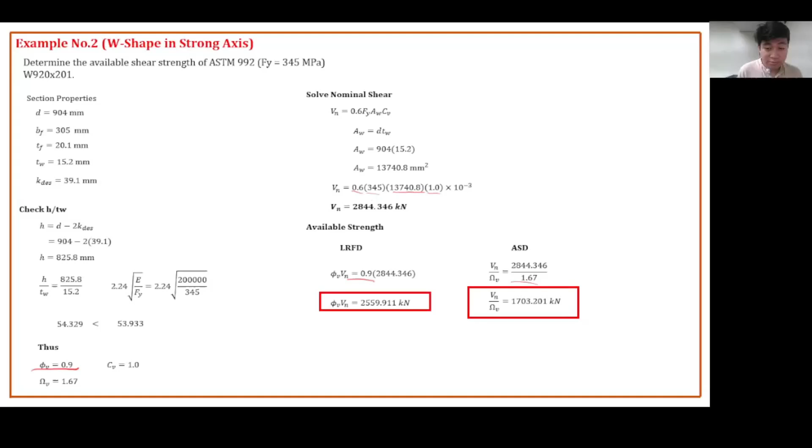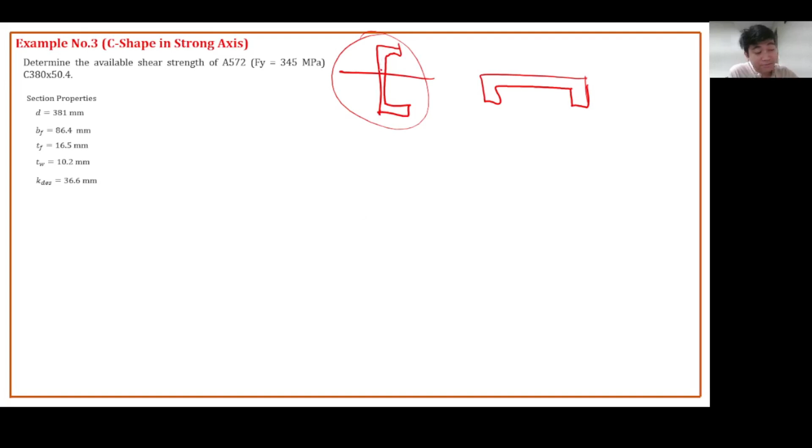Okay, so for these problems, we will solve the C shape channel, which will bend about the strong axis. Usually we have to place the beam like this, because if you place it the other way, it will easily bend in terms of flexure and shear—it's very weak. So we place it like this, because later on we will explain the area of the web here. How do you calculate the area of the web?

First thing to do is to check H over TW. You don't have to check this one because it is only applicable for webs of rolled I-shape members, so you now proceed with this one.

H over TW. For doubly symmetric shapes, singly symmetric shapes, and channels—other doubly symmetric shapes are hollow steel sections, which are doubly symmetric in both axes. Even for built-up sections, for built-up I you may use number 2, but for rolled I always use 1.0. For built-up I you may use this for hollow steel sections because those are doubly symmetric shapes.

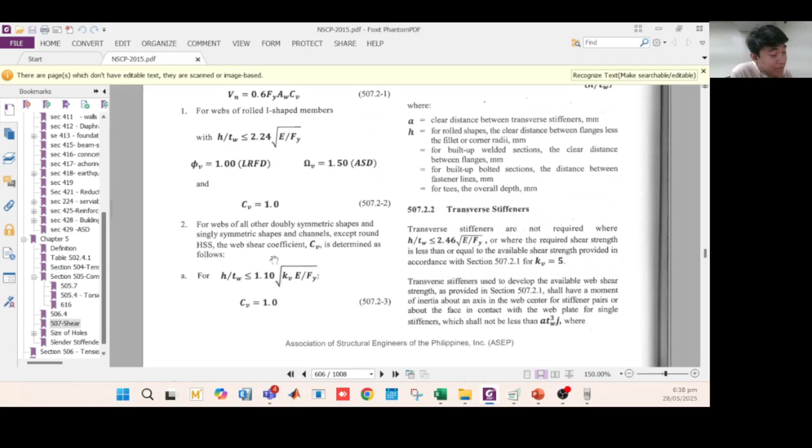For number 2, we're dealing with channels. So we have to check what is the value of H over TW compared to 1.10, and also 1.37 times the square root of E, square root of KV E over FY. So we have a new variable here.

What is KV? KV is 5 plus 5 over (A over H) squared. We know the H. How about A? What is A?

A is the clear distance between the transverse stiffeners. So what are stiffeners? Transverse stiffeners are structural elements used primarily in plate girders, box girders, and thin-walled structural members to prevent buckling of the web. Due to the shear, due to the large value of shear, the web may buckle, so we provide these stiffeners to make the web stronger. They are oriented perpendicular, or transverse, to the longitudinal axis of the member—always positioned perpendicular to the longitudinal axis.

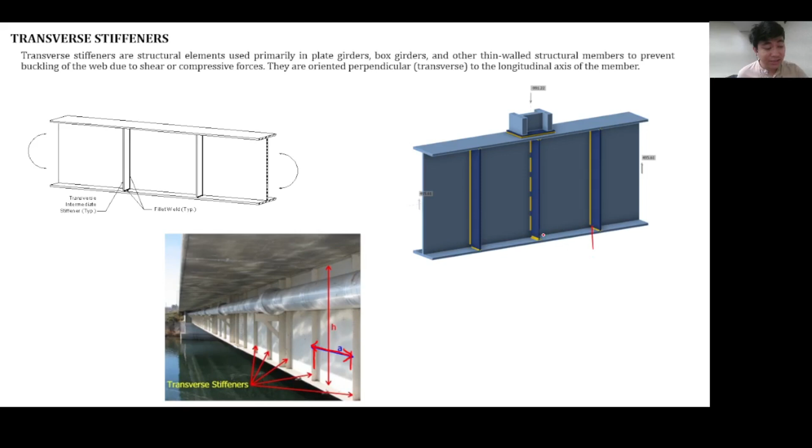These are transverse stiffeners. So what is A? A is the clear distance now between the stiffeners—clear distance, not center to center, but clear distance. That is the value of A in millimeters, and you divide it by H.

You know the H. If that value is greater than 3.0, you use KV equals 5. The lowest value of KV is actually 5, for stiffened webs. And if your A over H is greater than this value, you have to check this value—still 5. You may use this for checking A over H, or 3.0, but we can just use 3.0.

If this was not satisfied, use this formula.

For unstiffened webs with H over TW less than 260, what do we mean by unstiffened webs? For W sections, webs are stiffened because they are supported top and bottom. So what are unstiffened webs? As you can see here, the web is only supported here, but on the bottom portion it is not supported. When you say stiffened, it is supported on both ends—those are stiffened elements. For unstiffened elements, it is not supported on both ends. So these are unstiffened, usually like flanges.

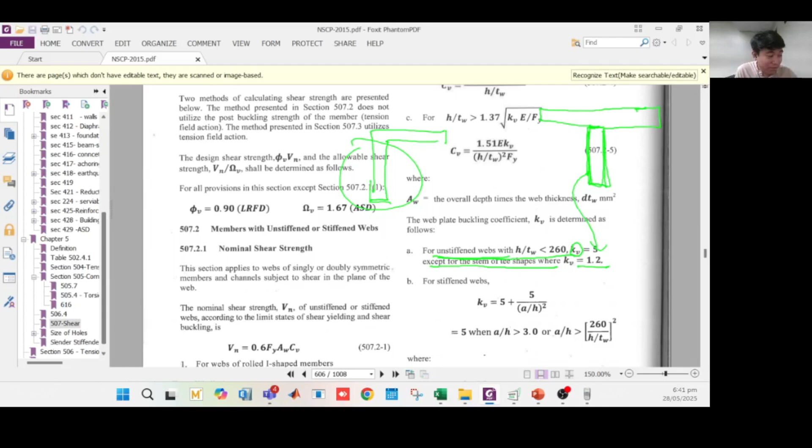If we're going to check this code, this is only applicable to double symmetric and single symmetric shapes. Ibig sabihin, hindi siya applicable sa angle bars, yung number 2. So the angle, not applicable siya dito, class. You don't have to use this for angle bars.

So try to think of another shape which is singly symmetric na may unstiffened webs. So, built up, no? You may create a built up as long as the web is unstiffened, not supported top and bottom. Okay, so those are the values of KV.

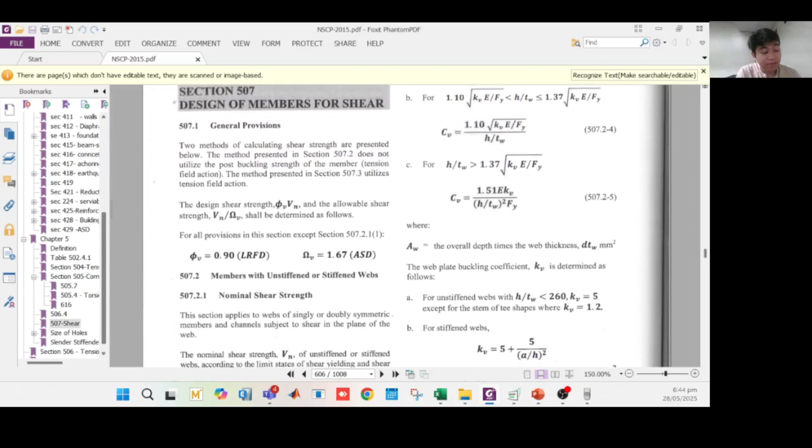What if wala naman sa problem na binanggit na may stiffener? Walang sinabi dito. There's no any diagram which shows the distance of the A. So we can say that there's no stiffener, or we can just assume that no stiffener all throughout the entire length of your beam. So ibig sabihin your A is very large compared to H. And if you compare that large value of A over H, that will be always greater than 3.0.

Or if there's no stiffener provided on your beam, always say that KV is 5.0.

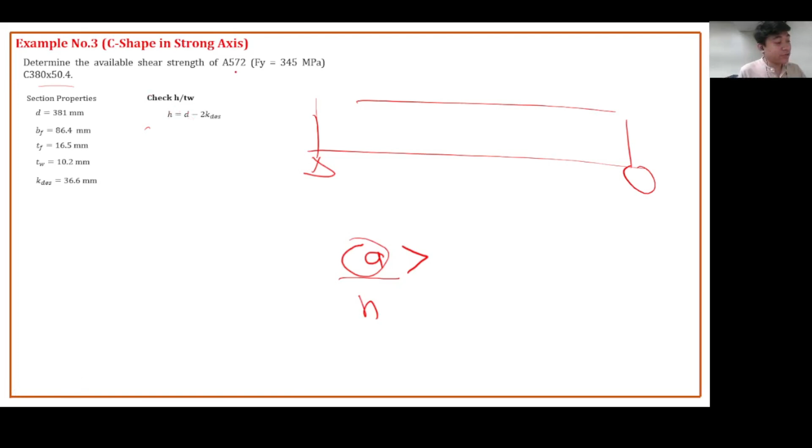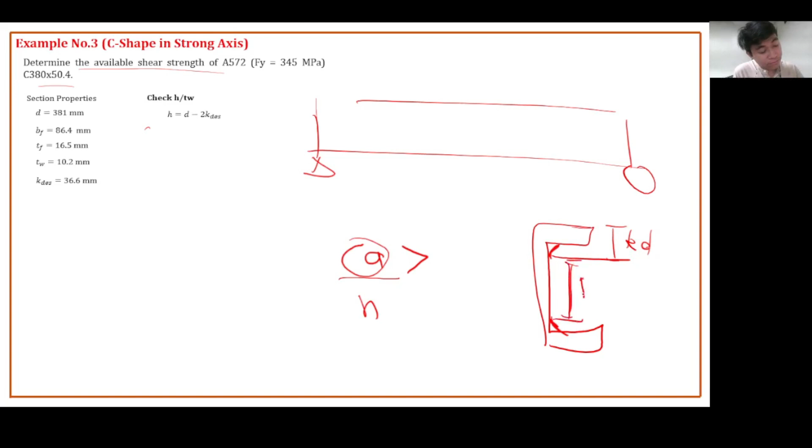So we can now compare the H over TW. Anyway, for channel, the H is still KDES, kasi meron pa rin ditong radius, class. So this is still KDES. So this is your H: D minus 2 KDES.

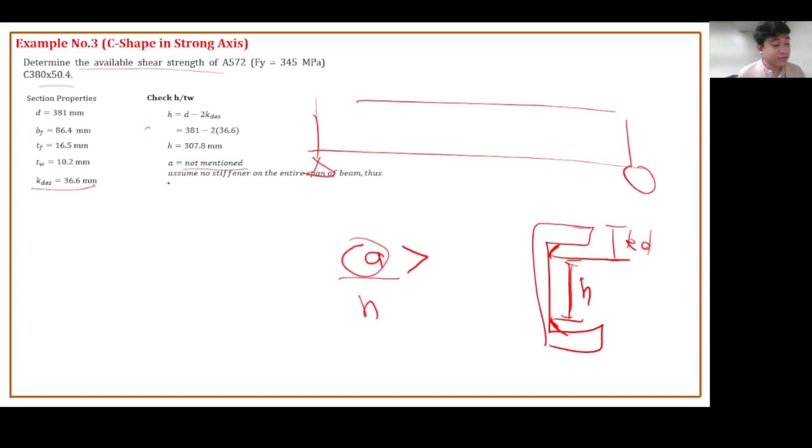So again, A is not mentioned, so assume no stiffener on the entire span of the beam, thus KV is 5.0. We can now solve the H over TW because we have the H, we have the thickness of the web. You compare that to square root of KV E over Fy, compared to 1.0.

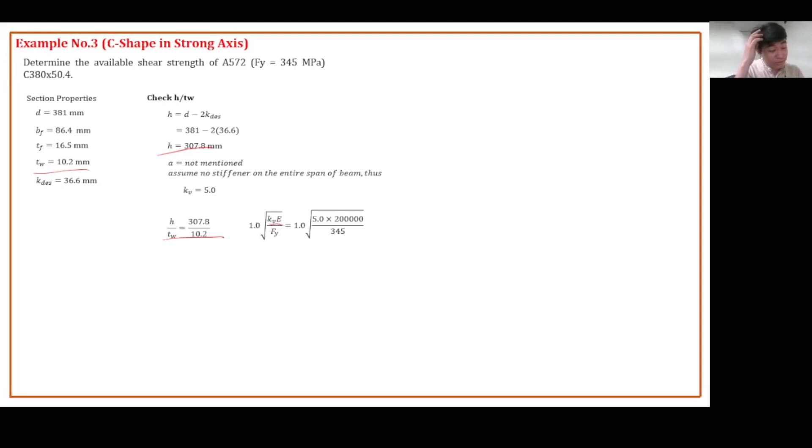Because we want to check if we exceed this value, let's see. So we have 30.176, and that is less than to this value. Imagine, 69 - this is the smallest value for KV. Maglagay pa tayo ng stiffener, tataas lagi itong pang-compare natin, class. So let's assume that this is the smallest value for the comparison.

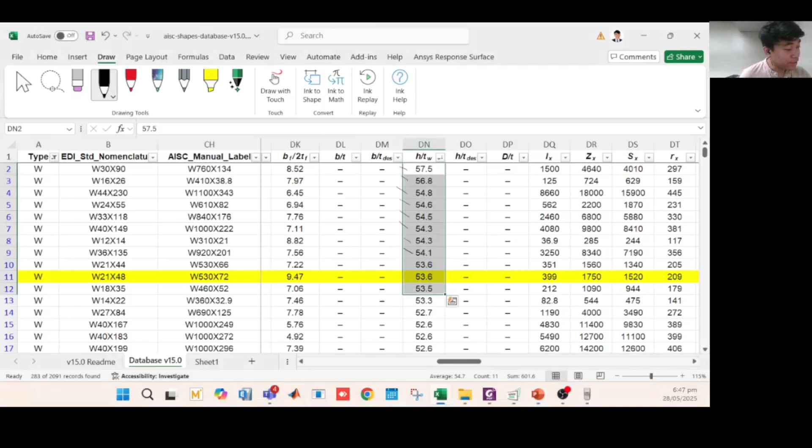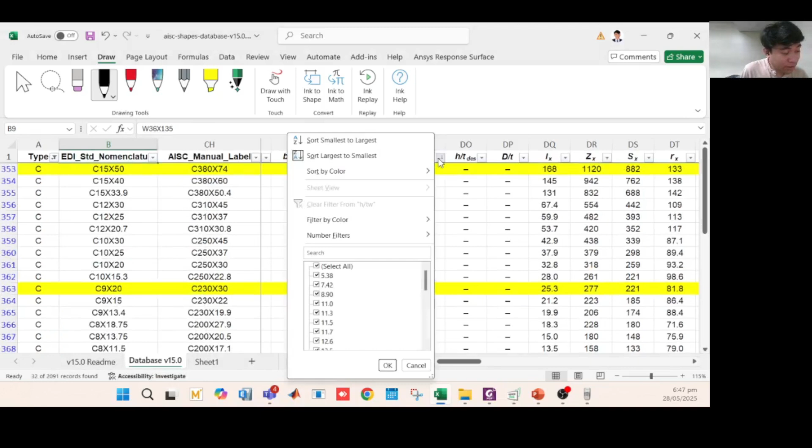And we are going to look for this value on the database. So looking at the database, if we are going to sort the H over TW of a channel, look at this - the largest value of the H over TW for channel is 36.3. So kahit anong gawin natin dito, class, kahit anong value ng KV dyan, tataas palagi yan. Kasi for channels, the minimum value of KV is 5.0, no stiffener, so this is a very large value. So for channel it will no longer exceed 1.0.

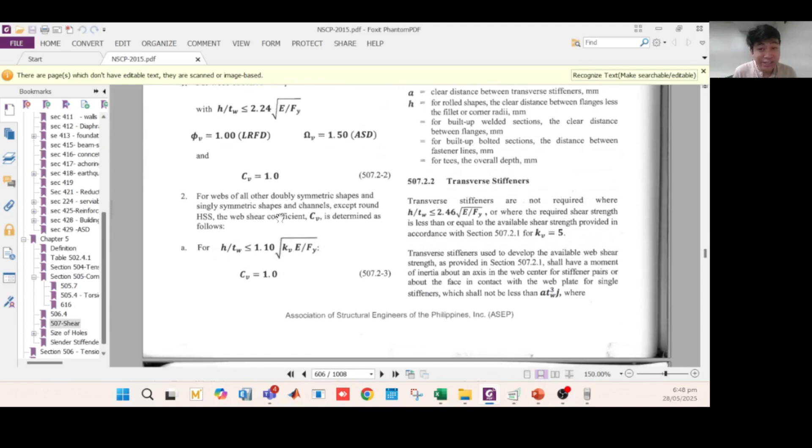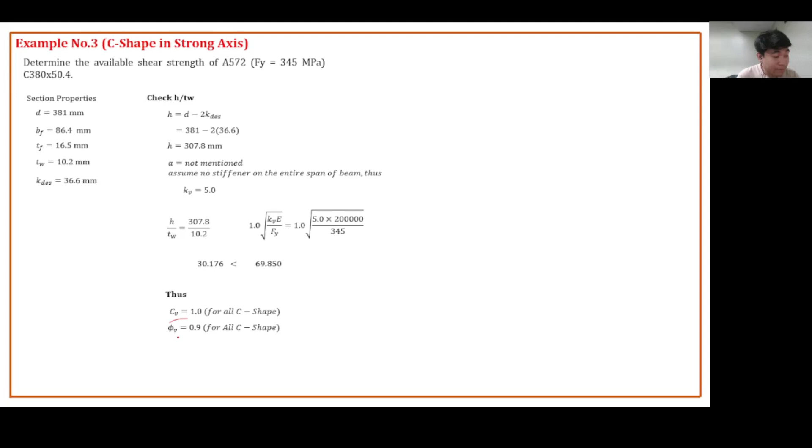What does it mean? So the H over TW of channel will not exceed 1.10 of kV, square root of E, square root of kV E over Fy. So therefore CV for channel is always 1.0, and aside from this, which uses reduction factor and safety factor na 1.5, the rest should use this reduction factor 1.67. For any other shape, always use that reduction factor, aside from W section, which satisfy this condition, laging less than. So for all C shape, use CV 1.0, 0.9 and 1.67. Actually, for all shapes aside from I, use 0.9, 1.67. But for all C shape class, laging 1.0 for CV.

Okay, so now let's solve the nominal capacity, nominal shear of the channel. So Vn is equal to 0.6 Fy AW times the CV. Same formula applies: Fy, the area ng web is D times the thickness of the web. So you're looking for the area of this one, because this one will resist the shear.

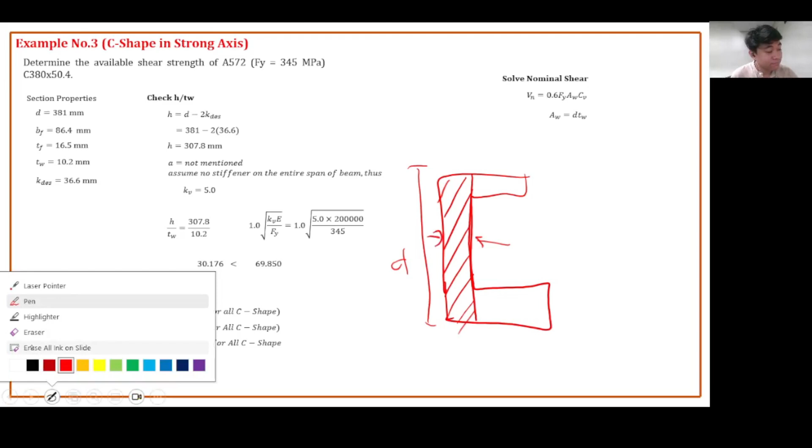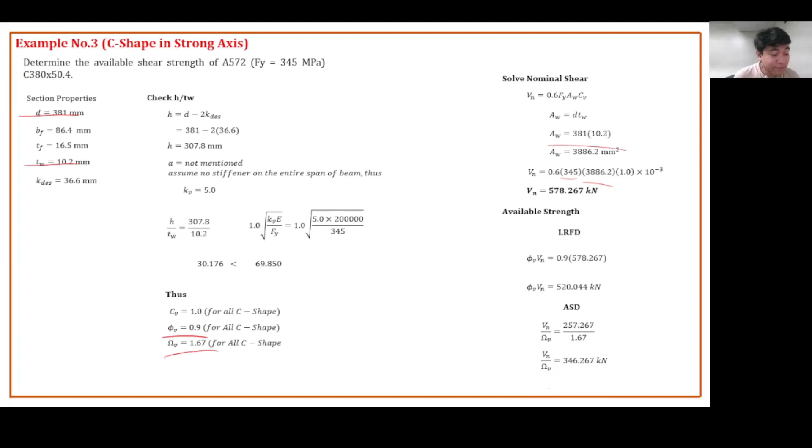D times the thickness of the web. So D is 381, thickness of the web is 10.2. So area of web is 3886.2. So solving 0.6 Fy AW times CV nominal. Let's solve the available shear strength for LRFD, use the reduction factor, safety factor for ASD. Answer: 520 for LRFD. For ASD, 346 kilonewtons.